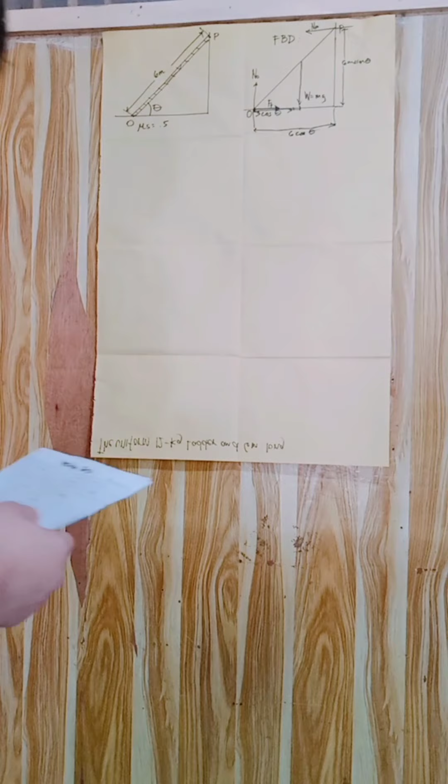In this video, the topic discussed is friction force. The uniform 12 kilogram ladder, 6 meters long, rests against the smooth wall at point P, and the end rests on the rough horizontal plane, for which the coefficient of static friction mu static is equal to 0.5. Determine the angle of inclination of the ladder and the normal force at O and P if the ladder is on the verge of slipping.

Here is the figure, the 6 meter long ladder. Next we need to draw the free body diagram. At point O, there is a normal force N sub O, and a frictional force going to the right. At point P, there is a normal force acting on it going to the negative x-axis, and a weight W equals mg.

First we need to solve for the weight. Weight is equal to mg, which is equal to 12 kilogram times 9.8, equal to 117.6 Newton.

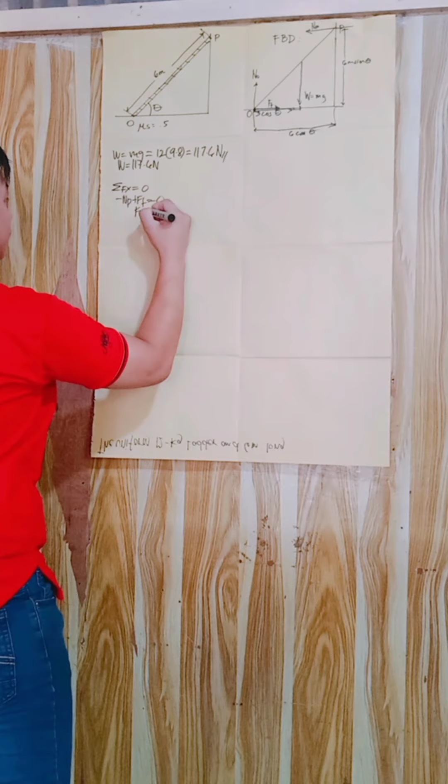Then we will solve for the normal force on P. To solve this, we need to use the equilibrium equation. The summation of forces in x is equal to 0, equal to negative N sub P going to the left plus frictional force going to the right equal to 0. We transfer N sub P to the right, so that frictional force is equal to the normal force of P.

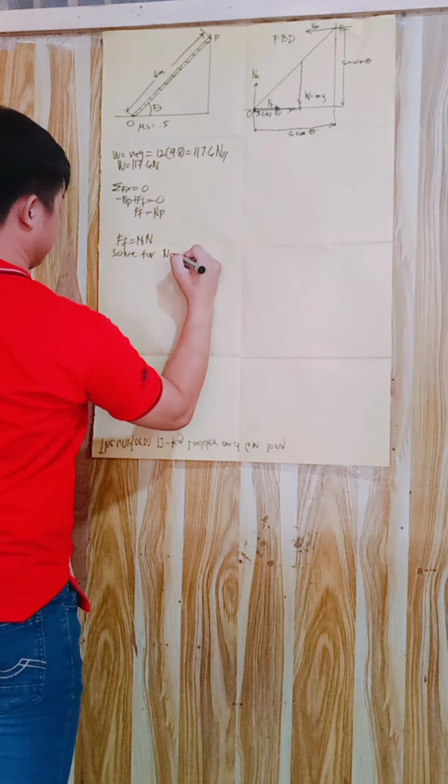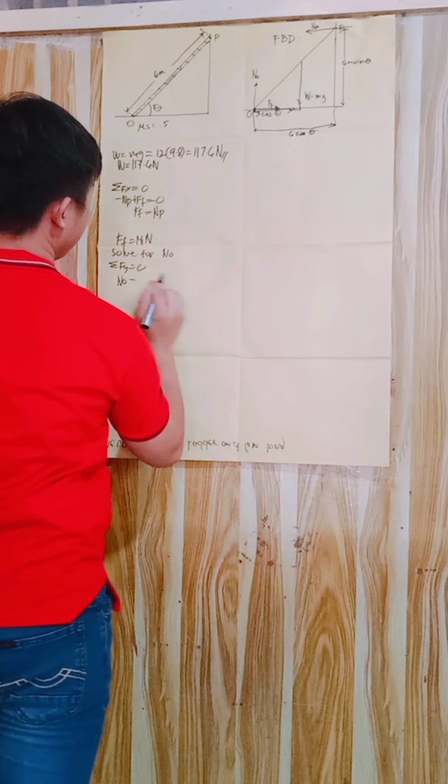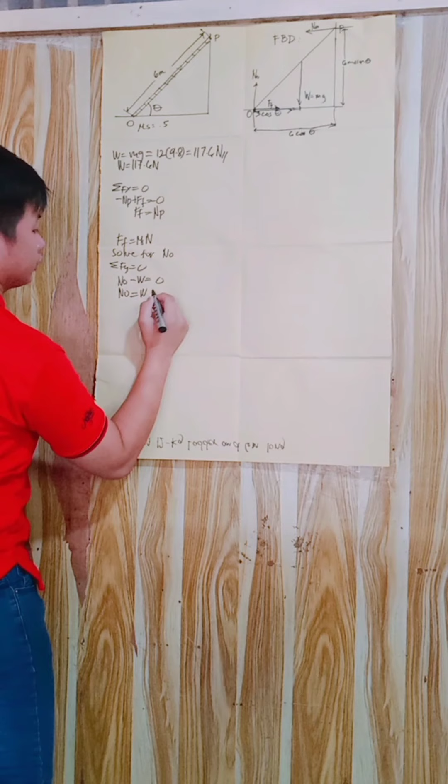We know that the frictional force is equal to mu static times N. Then solve for N sub O. Summation of forces in y is equal to 0: N sub O going upwards, which becomes positive, and the weight going downwards, which is negative, equal 0. Then transfer the weight to the other side: W, which we know is equal to 117.6 Newton.

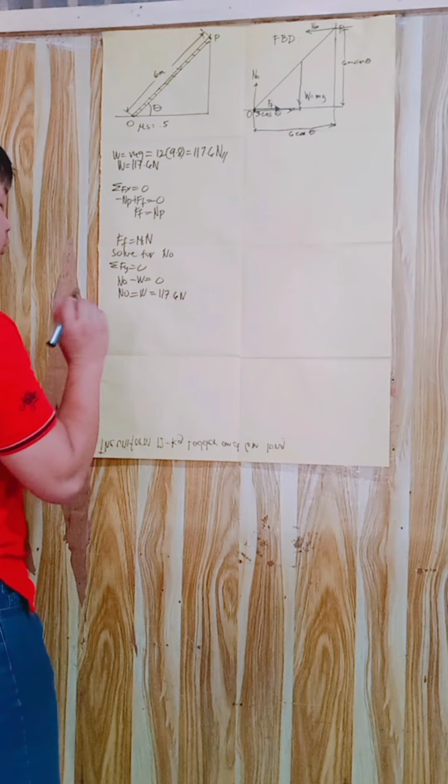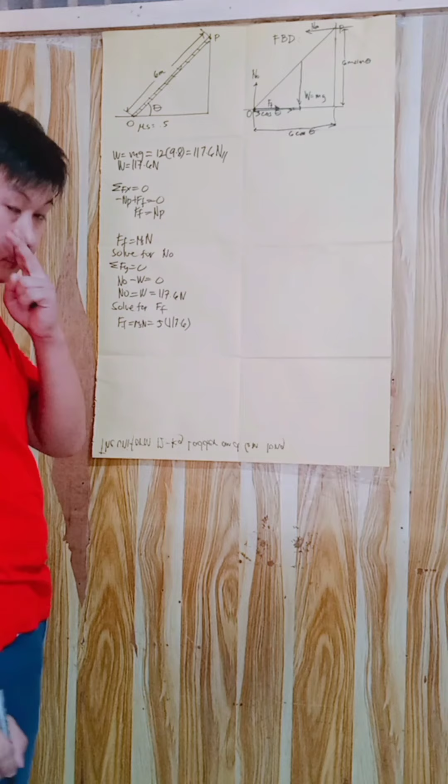After we get N sub O, we can now solve the frictional force. FF is equal to mu static times N, which equals 0.5 times 117.6. The frictional force is equal to 58.8 Newton when solved on the calculator. Then the frictional force is equal to the normal force, which is equal to 58.8 Newton.

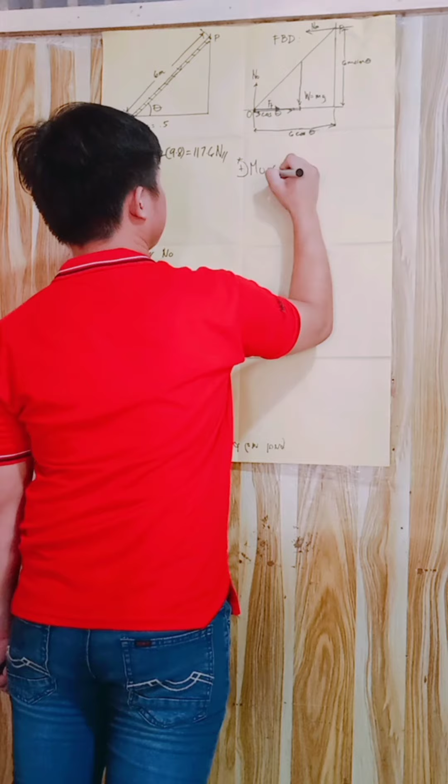To solve for the angle of inclination, we need to use the summation of moments. Summation of moments at O is equal to 0, because it is easier to find the moments at point O. So N sub P times the distance, which is 6 sine theta, minus — because W is going downwards, it will go clockwise, so it's negative — W times 3 cosine theta is equal to 0. We know that if we multiply N sub O and the frictional force into 0, it becomes 0, so we will not do that.

Then N sub P is 58.8 times 6 times sine theta, minus 117.6 times 3 cosine theta, equal to 0. Multiplying this gives 352.8 sine theta minus 117.6 times 3, also 352.8 cosine theta, equal to 0. Then we put this on the right hand side of the equation.

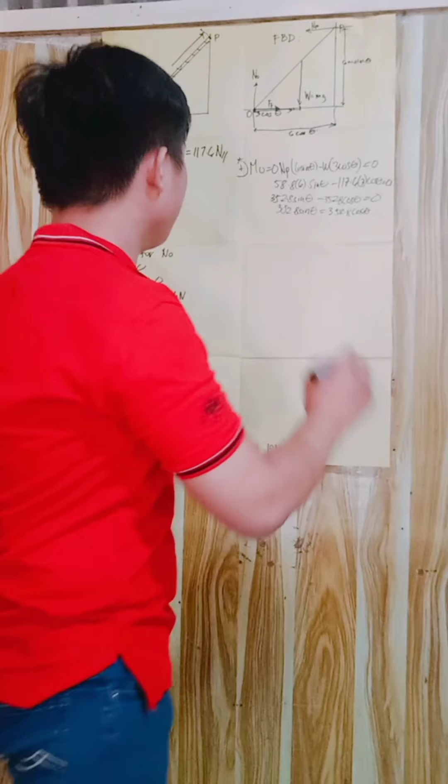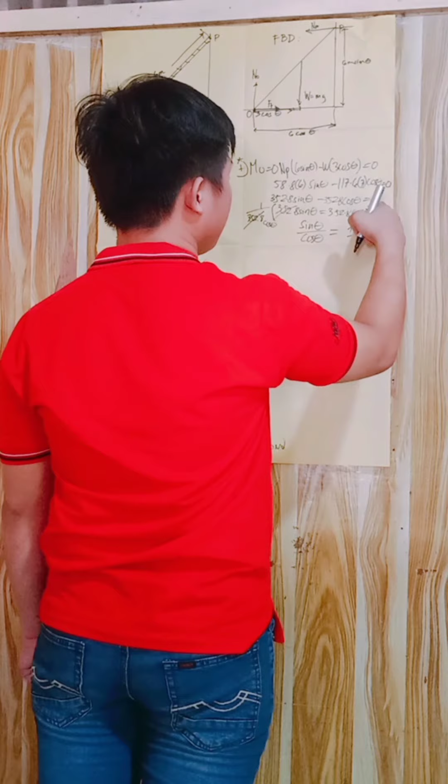Then 352.8 sine theta is equal to 352.8 cosine theta. To solve for theta, we multiply both sides by 1 over 352.8 cosine theta so that we can cancel this. We cancel this and also this, so what remains is sine theta over cosine theta equal to 1, because only one term is left. In our trigonometric identity, sine over cosine is equal to tan theta.

To get the value of theta, theta is equal to the inverse tangent of 1, which is equal to 45 degrees.

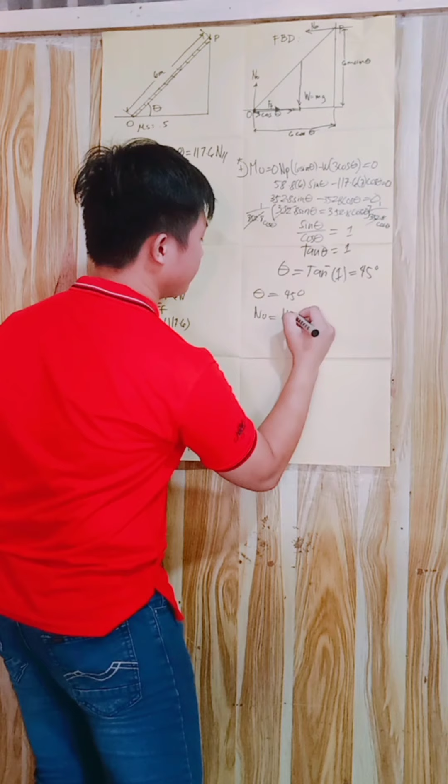Summary: theta is equal to 45 degrees, N sub O is equal to 117.6 Newton, and N sub P is equal to 58.8 Newton. So we write theta equals 45 degrees.

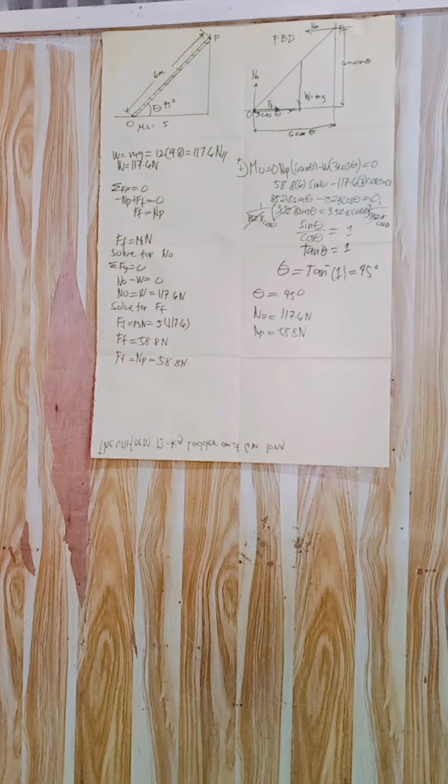The next topic is all about center of gravity and centroid. The problem is to determine the area and locate the centroid, x bar and y bar, of the shaded area. This is the shaded area.

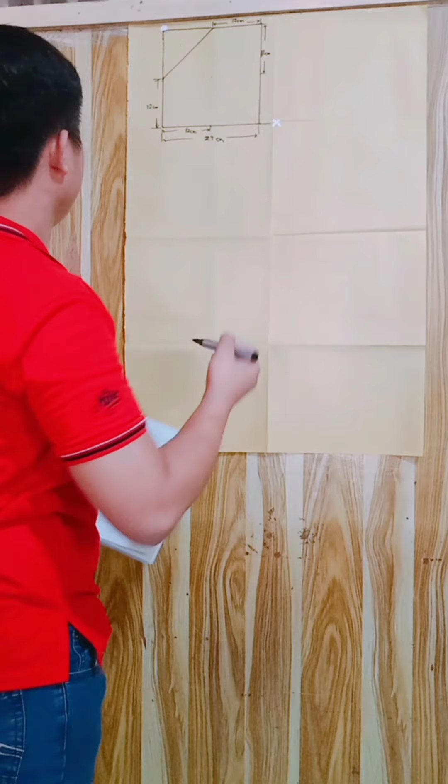Unlike other problems, we are going to divide it by parts. So what I'm going to do is add it as a whole square. After getting the area of this, the centroid, we are going to minus the area of this.

Let's solve for area 1, which is the square. Area 1 is equal to 24 squared, which is equal to 576 centimeters squared.

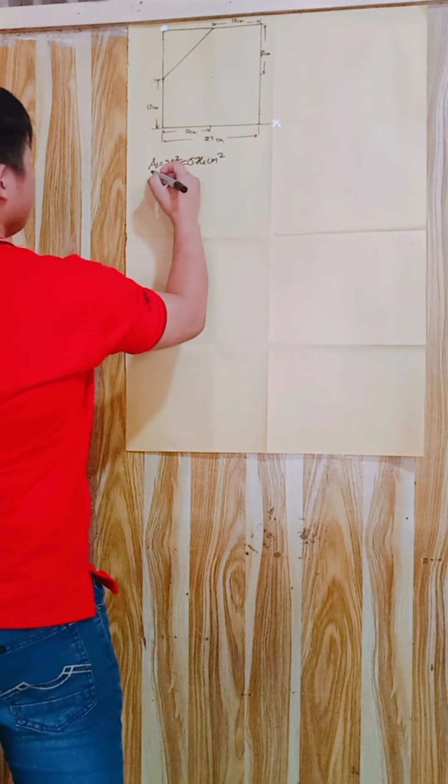After getting that, we are going to solve the area of the triangle, which is equal to 1/2 base times height. Base is equal to 12, times height, times 1/2, is equal to 72 centimeter squared.

Area total is equal to 576 minus 72, which is equal to 504 centimeters squared.

Then we will get x bar 1, which is equal to 12. Here it is, x bar 1. Y bar 1 is equal to 12.

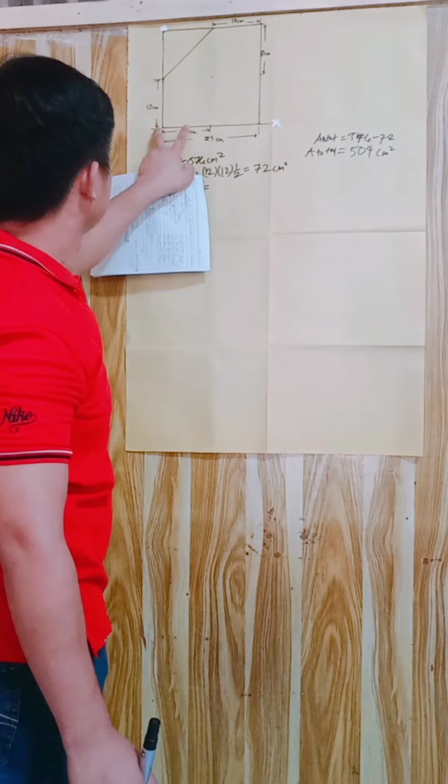Then y bar 2 is equal to 12 plus 2 over 3 of the base, which is equal to 20.

Then, to get the x bar, we need to multiply the area by x bar sub 1, and area 2 by x bar sub 2, divided by the area total. So area 1, 576, times x bar 1, minus — because this is not part of it — we will minus that 72 area of this, times 4, x bar 2, divided by 504.

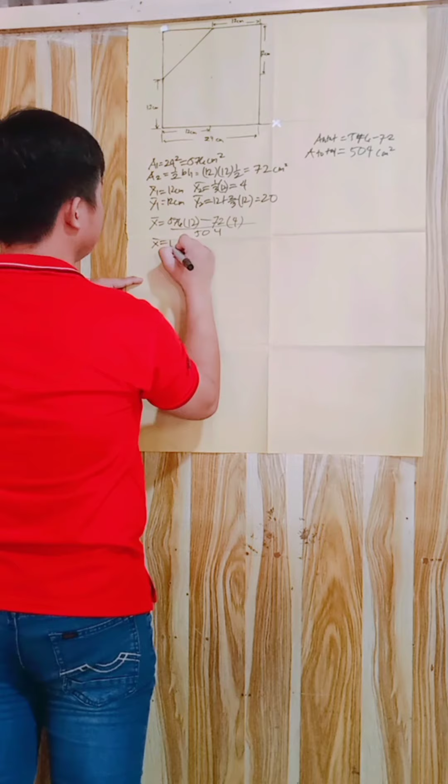X bar is equal to 13.14 centimeters.

Then y bar, we can get this by multiplying the area times the y bar. So area 1, 576, times y bar 1, which is 12, minus area 72, the area of this, times y bar 2, which is equal to 20, divided by the area total.

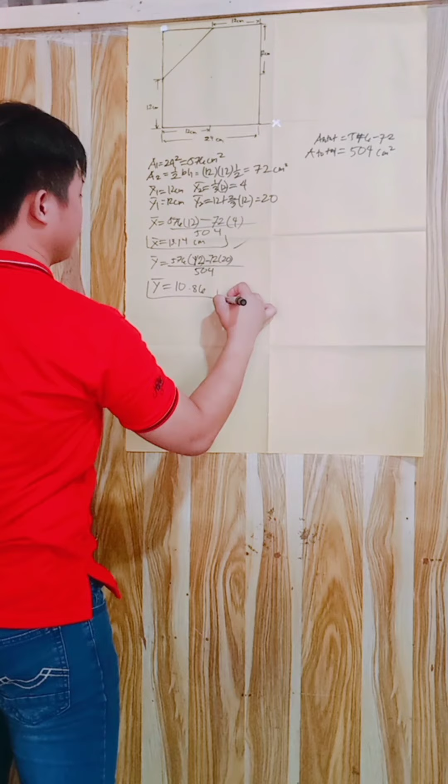10.86. So this is the x bar, and this is the y bar. And this is the total area.

The third problem is about the parallel axis theorem. The question is, determine the area of the composite shape and find the IXX moment of inertia of a body along the horizontal centroidal axis. So this is the centroidal axis.

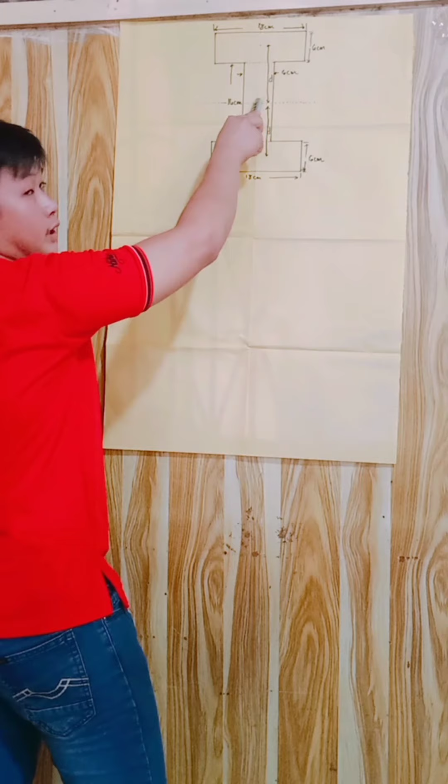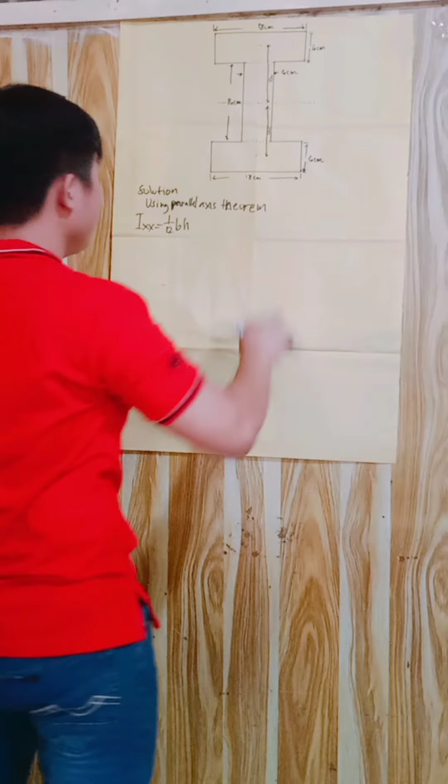Then the solution for this is by using the parallel axis theorem, which is I double x is equal to 1 over 12 base times height. This is the solution for type of figures like this, plus the area d squared.

It varies when you are getting the inertia. So IXX is equal to 1 over 12, area 1, base is equal to 18, then multiply by height 6 cubed, plus area of this is 108.

Area 1 is equal to 108. Area 2 is equal to 96. Area 3 is equal to 108 centimeter squared.

11 squared, plus then area 2, 1 over 12 times base, base is 6, times height of 16 cubed, plus 96 times, of course, 0, because it is in the origin.

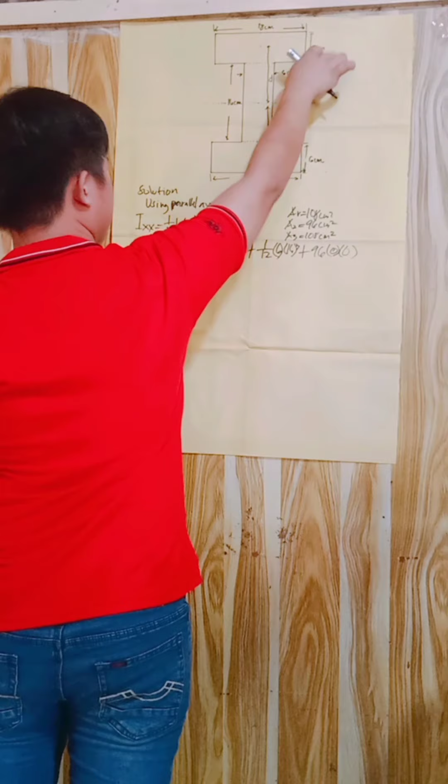Then this area 3, 1 over 12 times 18, which is the base, times height cubed, plus the area, which is also 108, times the distance.

So 6 divided by 2 is 3. Then divided by 2 is 8. 8 plus 3 is 11, and squared. So this will be cancelled.

And the one that will be left is, because this is similar, we will just go to 1 over 12 times 18 times 6 cubed, plus 108 times 11 squared, plus — okay, we just multiply it by 2 because this is similar.

Then plus 1 over 12, this times 6 times. So I of x at x is equal to...

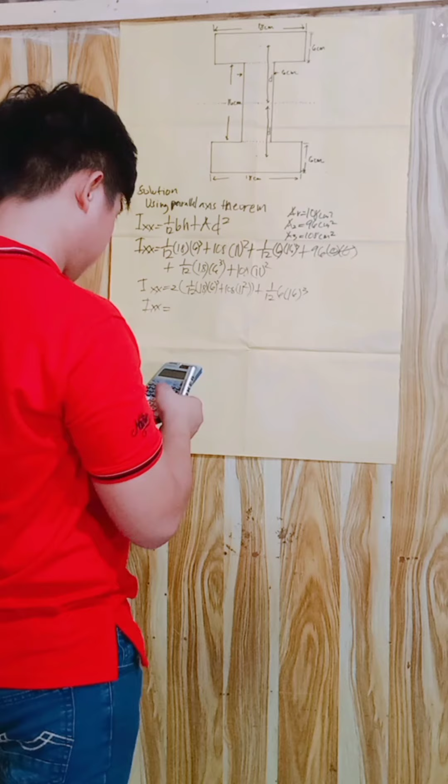I sub x is 28,832 centimeter to the fourth. This is the answer.

The next topic is about composite area. The problem is to determine the total area and location, x and y, of the centroid C of the shaded area. This is the shaded area.

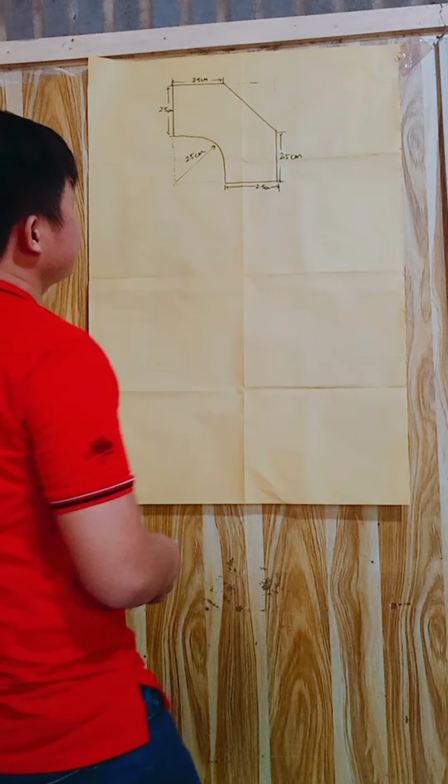The thing we need to do is make it a whole square, which has a side of 25 plus 25, equals 50, as well as 50 cm.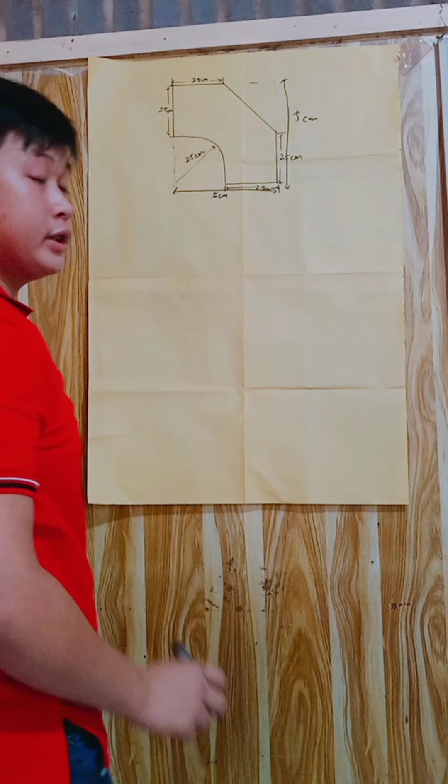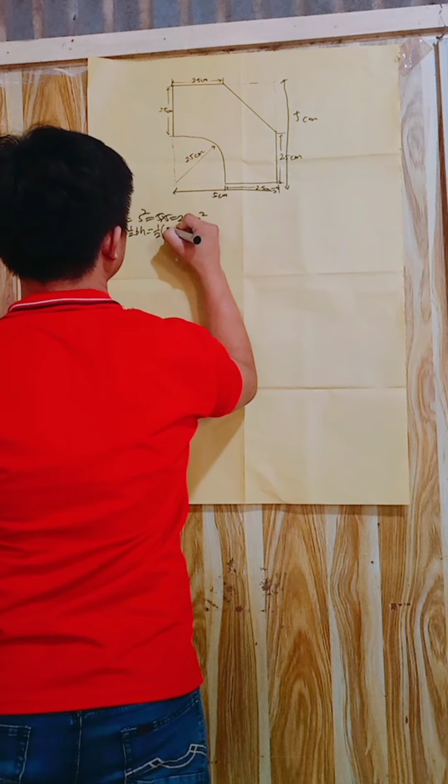First thing we need to do is find the area. Area of the whole square equals S squared, equals 5 times 5, equals 25 centimeters squared. Then area 2 is a triangle: 1/2 base times height, equals 1/2 times base 2.5 times height 2.5, equals 3.125 centimeters squared.

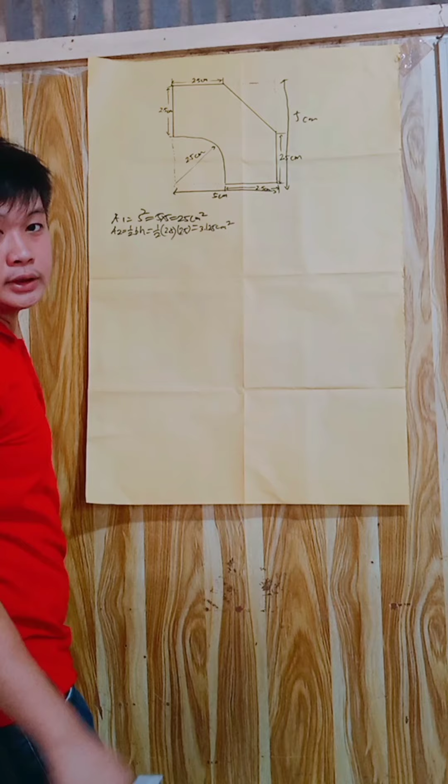Then area 3 is a quarter of a circle. The area of a quarter circle is just 1/4 pi r squared. So 1/4 pi times 2.5 squared equals 4.91 centimeters squared.

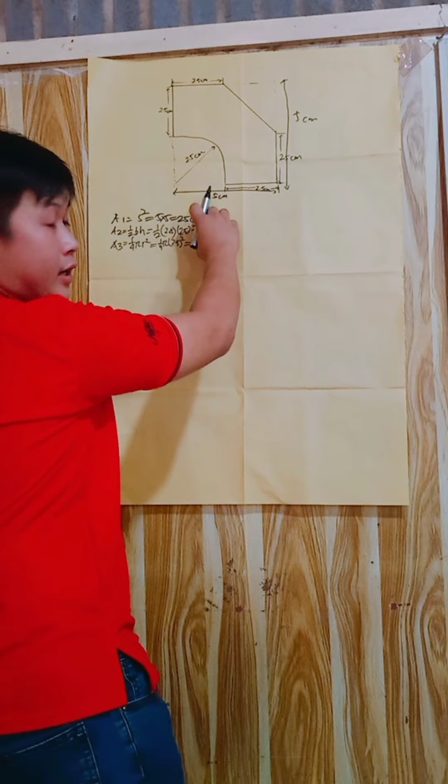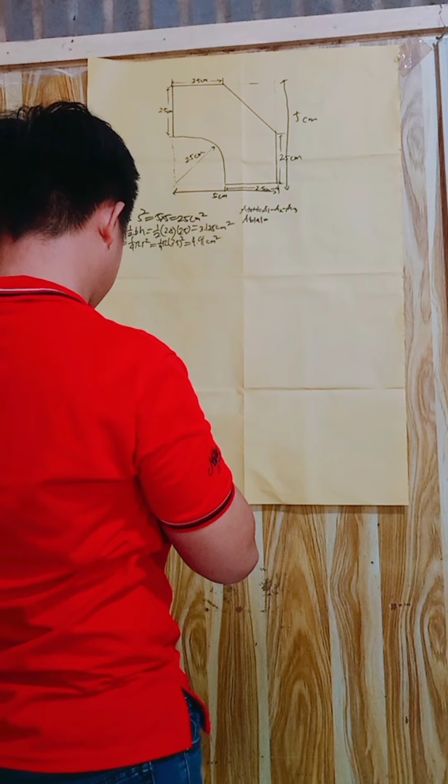Next we need to add all the areas to get the total area. We subtract area sub 2 and area sub 3 from the total. Area total equals 25 minus 3.125 minus 4.91, which equals 16.965 centimeters squared. So x bar sub 1 is...

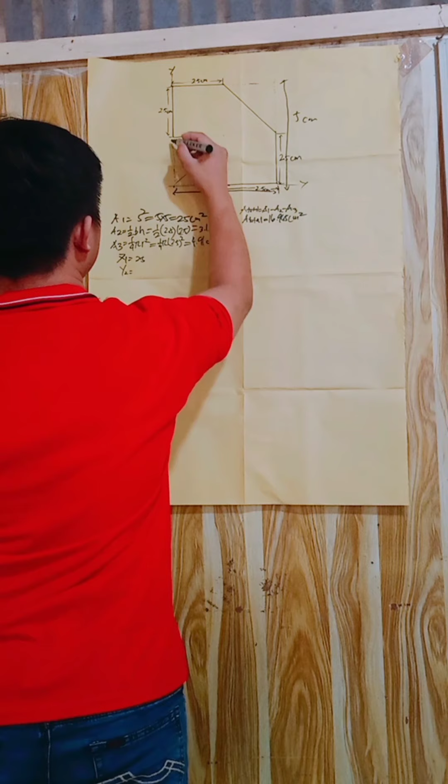So this is the reference. X bar sub 1 is 2.5 here, and y bar sub 1 is 2.5 also because of this.

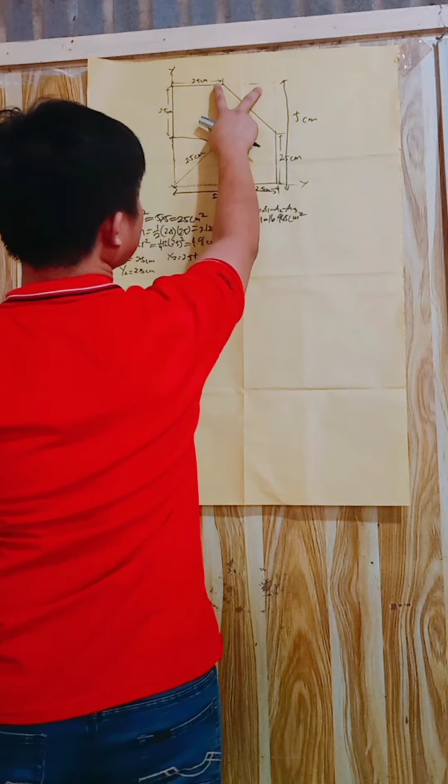X bar sub 2 equals 2.5 plus 2/3, because we are getting this 2/3 from the vertices. 2/3 of the base equals 4.1667 centimeters. Then y bar sub 2 equals, from this we add 2.5 plus 2/3 of the base.

And we have y bar sub 2 equals 4.1667 centimeters. Then x bar sub 3 equals, the formula is 4r over 3 pi. So 4 times radius of 2.5, this is the radius, over 3 pi. When we calculate that, we get 1.06 centimeters.

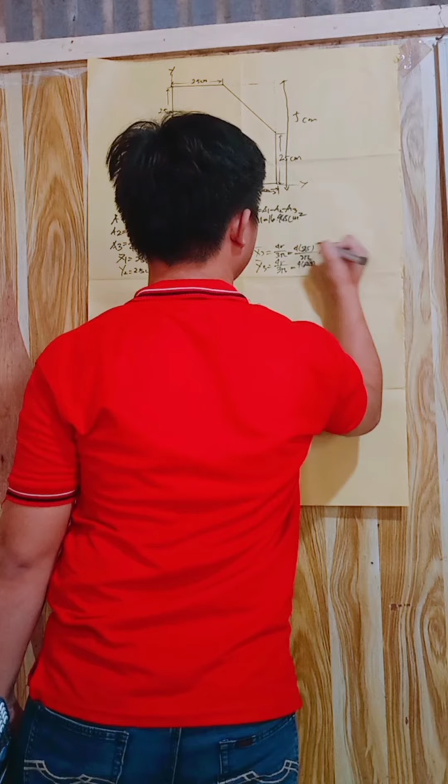Then y bar sub 3 is also the same formula. It equals 4 times 2.5 over 3 pi, equals 1.060. We're going to check if it's true.

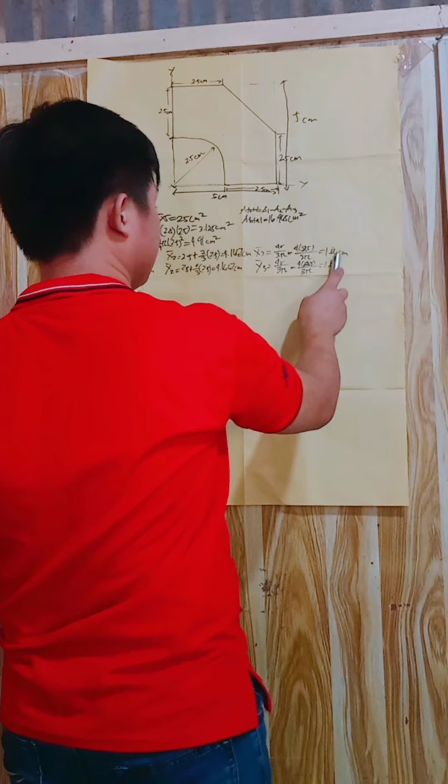4 times 2.5 over 3 pi. So okay, this is confirmed, this is right.

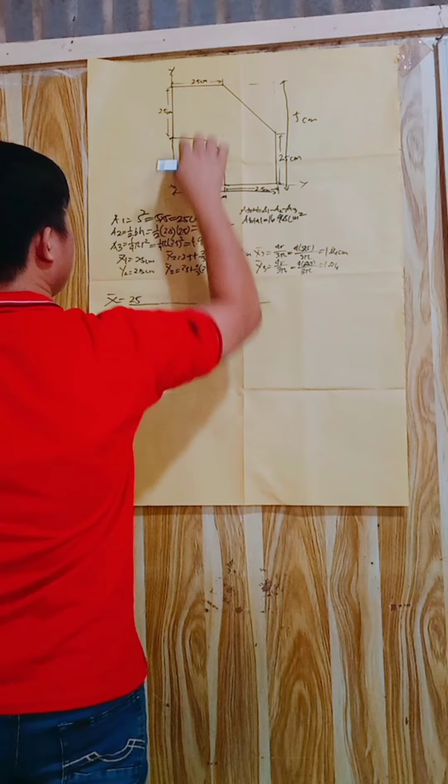Then to get x bar, similar to the previous topic we discussed, x bar equals the area times the x bar. So area of the whole times 2.5 x bar, minus, because this is not part of it, we discard that.

Minus area of the triangle, 3.125, times x bar 4.166, minus area 3, 4.91, multiplied by x bar 1.06, over the total area.

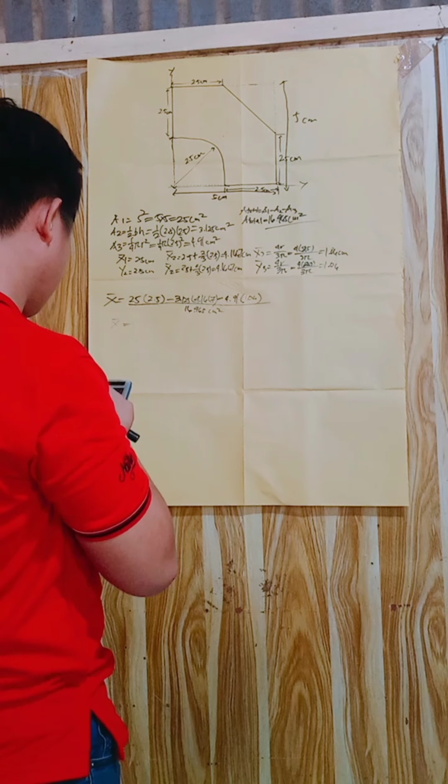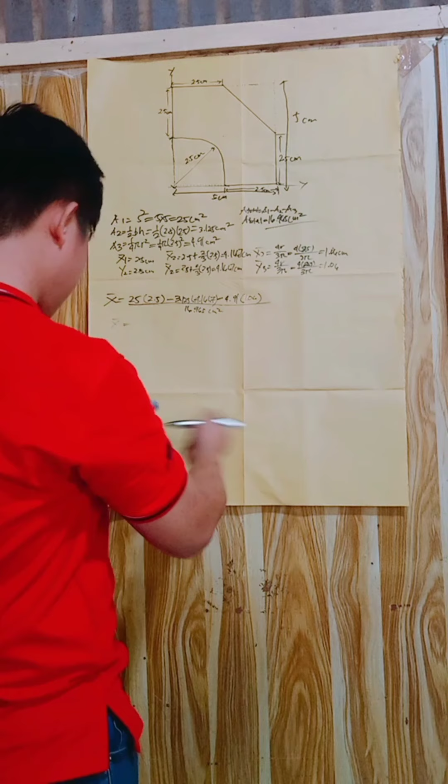Now when we calculate that, twenty-five, thirty... so we will get 2.62 centimeters.

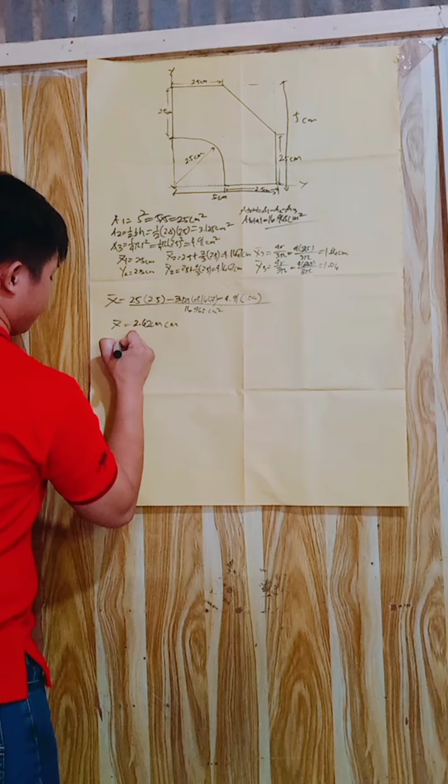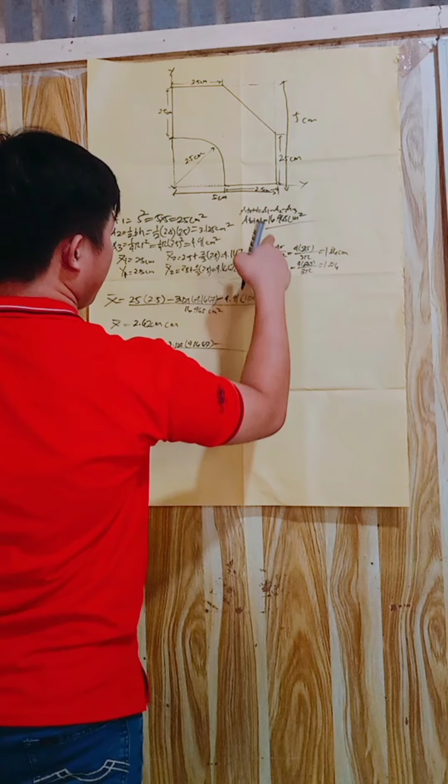Then y bar too. Similarly, the area multiplied by y bar sub 1, 2.5, minus the area of the triangle 3.125 multiplied by y bar sub 2, minus the area of the quarter circle times y bar sub 3, divided by the area total.

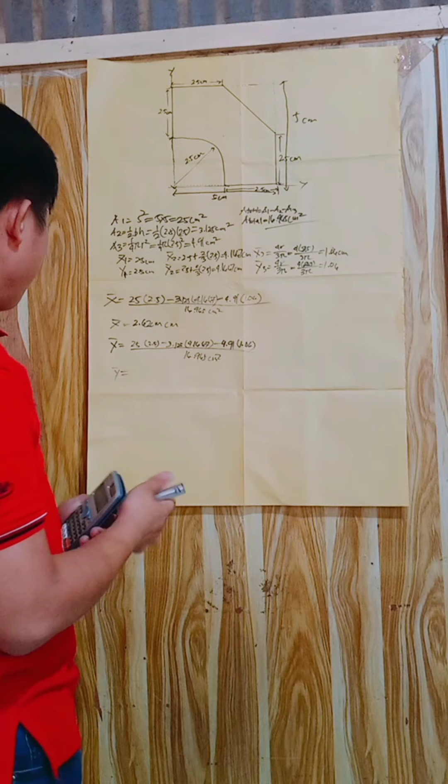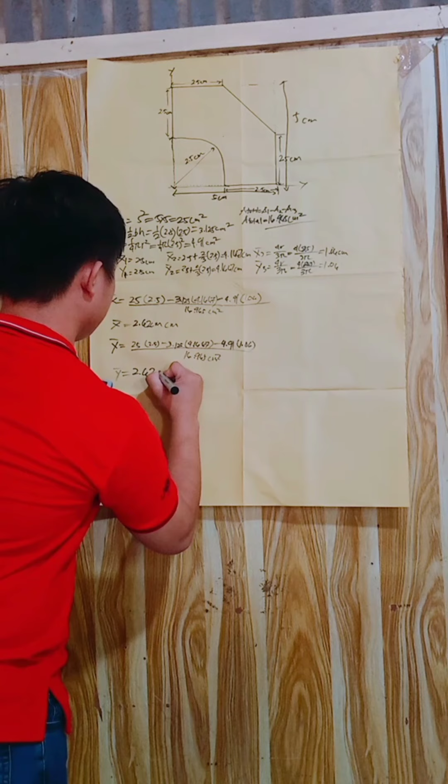So the y bar equals, similar to this, so we solved it a while ago, it is also similar, 2.62 centimeters. So this is the x bar and y bar.

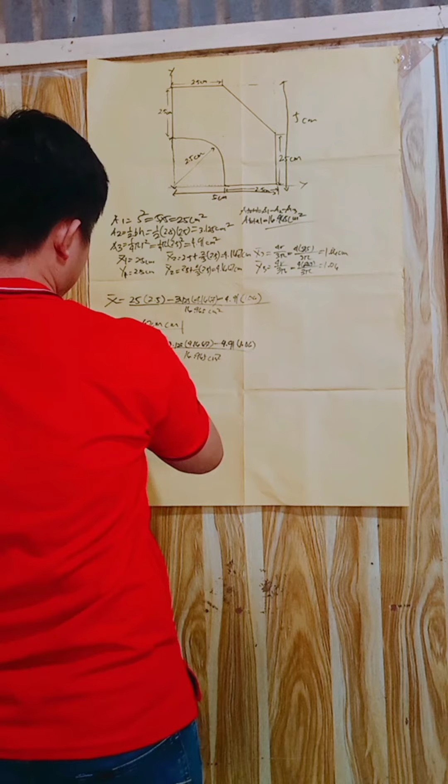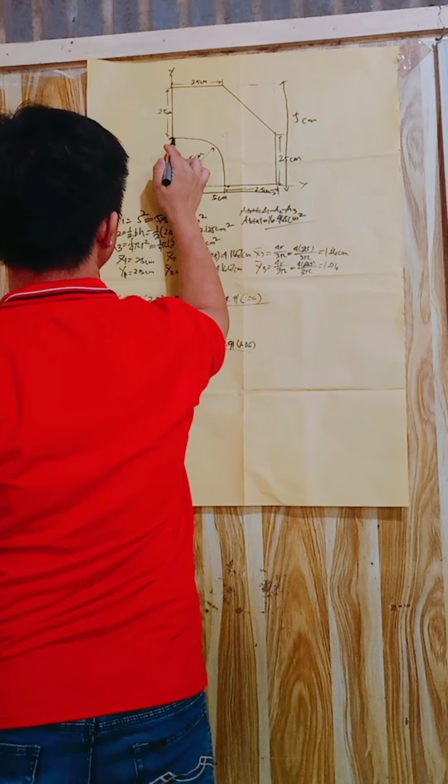So to locate that, we need to plot it. So 2.62, 2.5, approximately this is the x, and the y, and y bar equals 2.62. So this is 2.5, so probably in this, they will meet at this point. So this is the center.

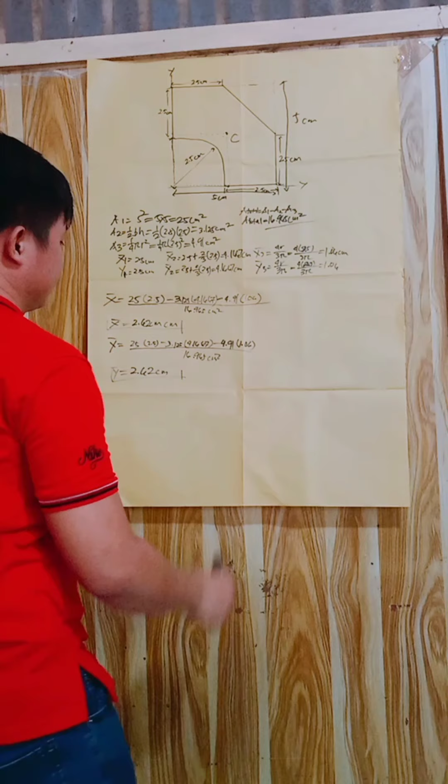The next problem is about product of inertia. The question is, find the product of inertia about x and y axis. So this is the figure: 14 inches, then 5 inches, then this 8 inches, then this is 13 inches, this is also 14 inches. So to solve this, we are going to...

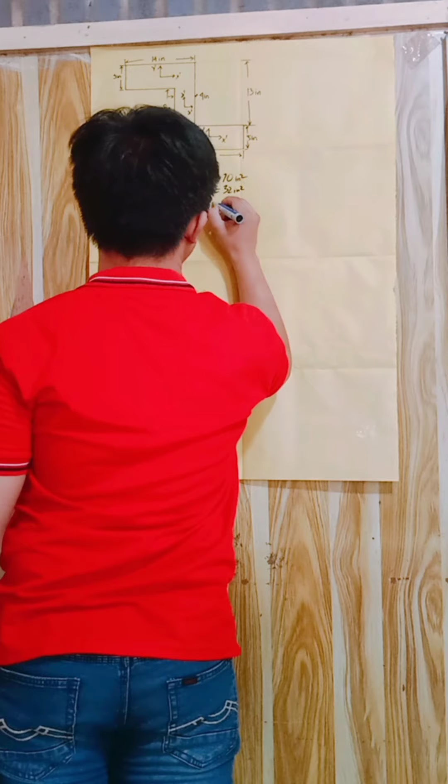Solution: find the area first. Area 1 equals 14 times 5, 70, which is good. Area 2 equals 4 times 8, 32. Area 3 equals, they're the same, so 70.

So we all know that if the shape is symmetrical, the product of inertia at their respective x-axis equals 0, and for x and y-axis it equals 0. So this is just similar, so they are all equal to 0. Y prime sub 2 is equal to 0.

After getting that, we know that this is all 0. Then we will use the parallel axis theorem, which equals to ix of y equals to ix prime y prime plus area times x bar y bar. So start: ixy sub 1 is equals to ix prime y prime sub 1.

So this will cancel, 0, plus area of area 1, 70, times the distance from this. So this is the x and y axis. This is y and this is x. So the distance of centroid to the origin.

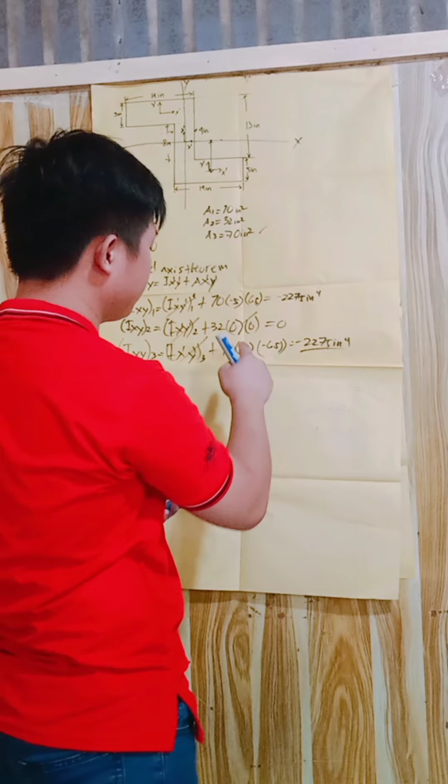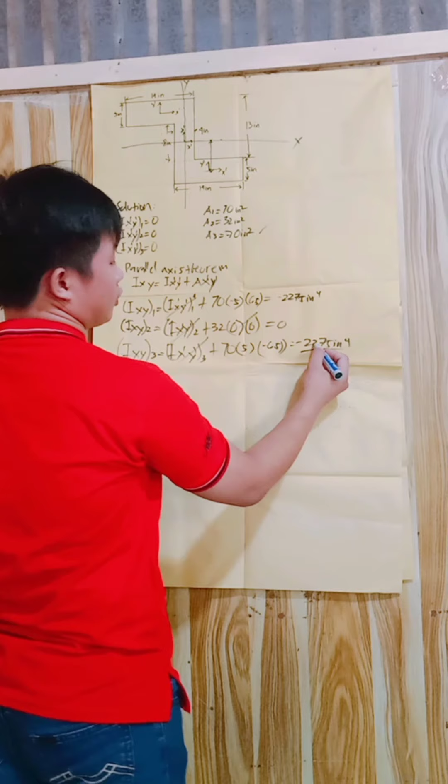So when you solve it, 70 times 5 times negative 6.5, so 70 times negative 5 times 6.5 equals negative 2275. Then you just add this 3: negative 2275 inches to the fourth minus 2275 inches to the fourth is equals to negative 4550 inches to the fourth. So this is the product of inertia along the x and y axis.

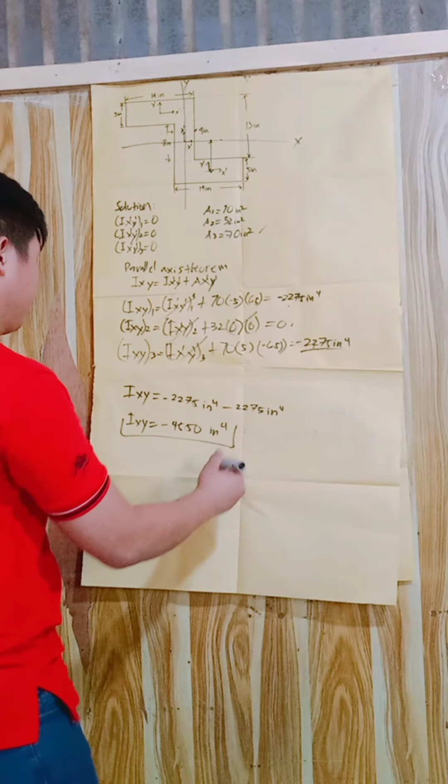So to get the mass moment of inertia of this plate, we will find it by: mass moment of inertia of this is equal to 1 over 12 mass times a squared. And for the circle, we have mass moment of inertia of the circle is 1/4 mass times r squared.

So let's start this by finding the mass of this, excluding that. So 12 kilograms times 4.2 squared equals 211.68 kilograms. This is mass 1.

And for the mass of this circle, we have pi r squared multiplied by 12. Mass 2 is equals to pi times 1.1 squared times 12, which equals 45.62 kilograms. And then we will use the parallel axis theorem.

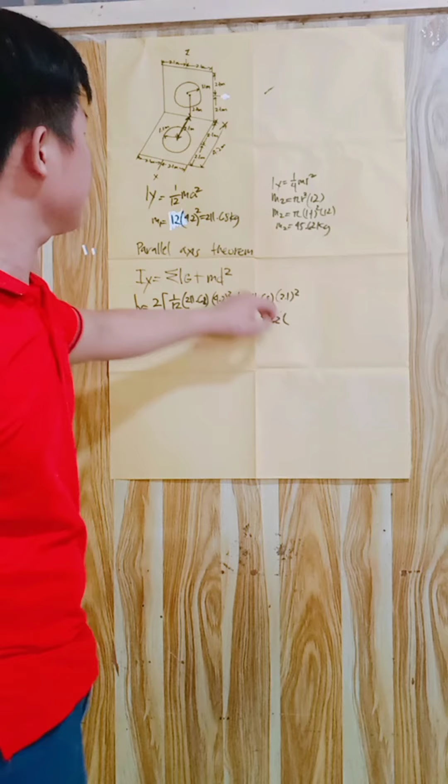So 2 times 1 over 4, because this is the formula, times mass. Mass is 45.62, times the area, times the radius rather, 1.1 squared, plus 45.62 times the distance of the centroid to the y-axis, which is equal to 2.1 squared.